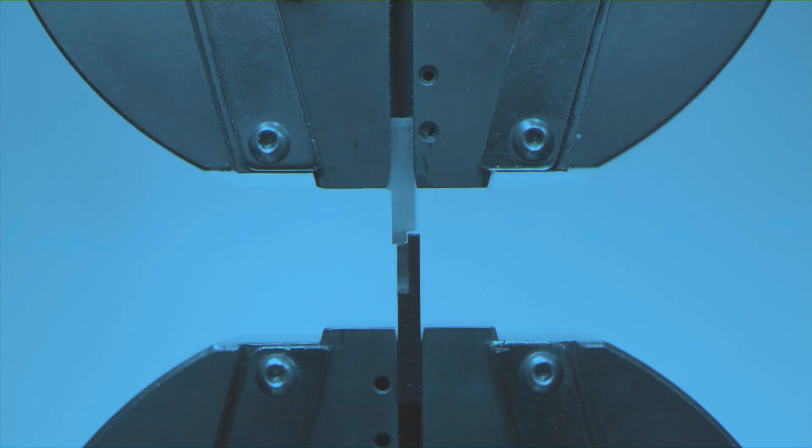Once we are done with the surface treatment, it's time to apply the adhesive. But which adhesives exist? That's what we will see in Module 4, Adhesive Families. We know now which surface treatments we should apply. It's time to look at the adhesive now and which adhesives we have at hand, especially for aeronautical applications.

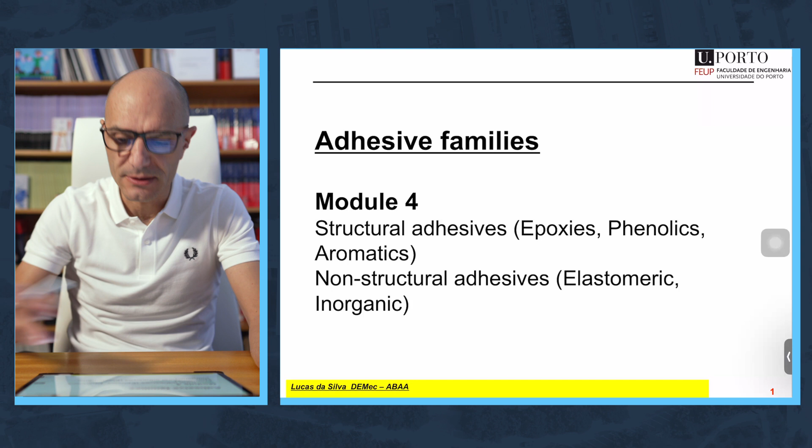I start with the most important one, the epoxy. It's, as I said, by far the most used. It's very strong, but also very brittle. This astronaut, I think, is very clear and illustrates well the key point associated to this adhesive, strong. It has low shrinkage, about 5% when it cures. This is very good because if you have adhesives that have a high shrinkage, then this will introduce residual stresses in the adhesive. Epoxies have a low, limited shrinkage, which is nice.

They can be supplied as one or two parts. When it's one part, the resin and the hardener are pre-mixed, but then they should be kept at very low temperature to avoid cure initiation. Two parts, the resin and the hardener are separated, and you just mix when you want to apply the adhesive. It has an exothermic cure, which is not very nice, because if you use too thick bond lines, the temperature will increase a lot during the cure and might even burn the adhesive.

The adhesive can be B-staged, that means it can be partially cured and supplied as a film, which is hard, but note that even a film adhesive that apparently is solid, when you apply it on a surface, it will melt because it needs to be heated, so it will go through the liquid phase that we know is indispensable to have a good wetting. That's the main adhesive family of the epoxy.

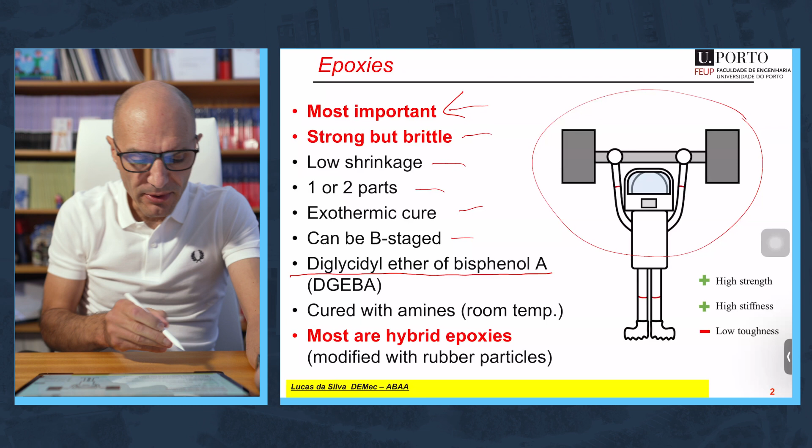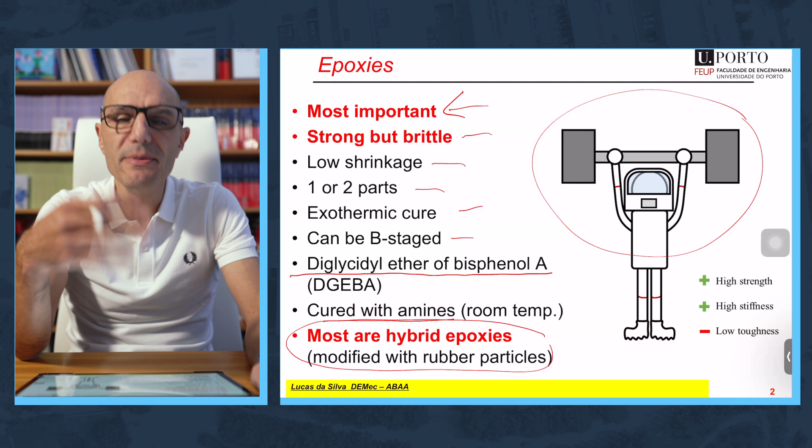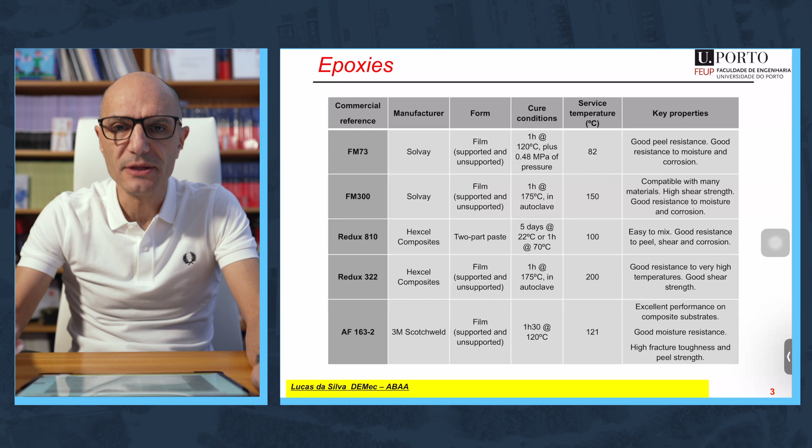Those that cure at room temperature, in general, use amines for the hardener. And in general, we are talking about hybrid epoxies. Pure epoxy is too brittle. So one typical way to improve the toughness of the adhesive is to mix it with rubber particles, and then we have toughened epoxies. You have in this table the most common film or epoxy adhesives used in the aeronautical industry. You see most of them are film adhesives. This one is a two-part paste, but most of them are film adhesives. In fact, most aeronautical adhesives are supplied as film adhesives. That's the most convenient way to bond big, smooth, plain areas.

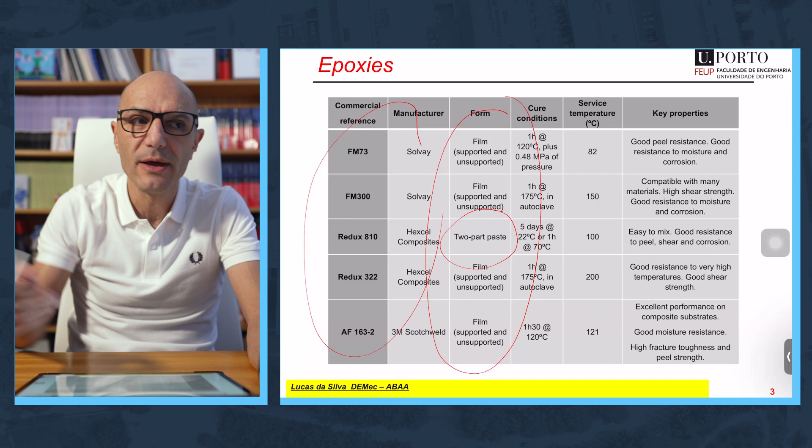And this is quite a conservative industry. It's very difficult to change the adhesive. These adhesives are very, very well characterized, and that's the adhesive they will use. Very difficult to change to another adhesive, because then they will need to run another set of tests, which is very time consuming, very expensive, and they don't really know how they will behave. They are fully confident in these adhesives.

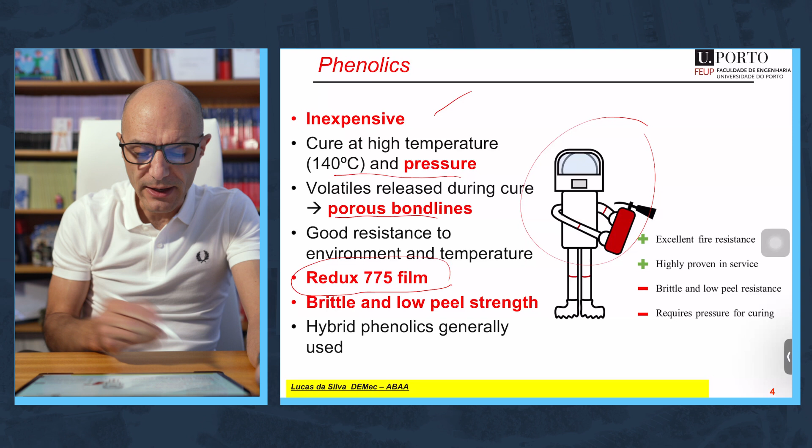Phenolics also, actually this is an historical adhesive. The first synthetic adhesive was a phenolic adhesive, a film. It's Redux 775, really historical in this industry. It's quite strong, and it's resistant to temperature, as the astronaut shows, and it's cheap. That's one of the most important things about this adhesive. But it needs a lot of pressure during manufacture. The phenolic needs a lot of pressure, otherwise you will have porous bond lines. And again, pure phenolic is too brittle. In general, they are modified with other adhesives.

But why are phenolics particularly sensitive to the pressure? That's because they cure by condensation. Some adhesives cure by addition, others cure by condensation. And those that cure by condensation, during the chemical reaction, there will be a release of water. And because the cure is at high temperature, we are talking about vapor, and this will expand. So to counteract this effect, you need to apply a high pressure to make sure you don't have porosity in the bond line. All right?

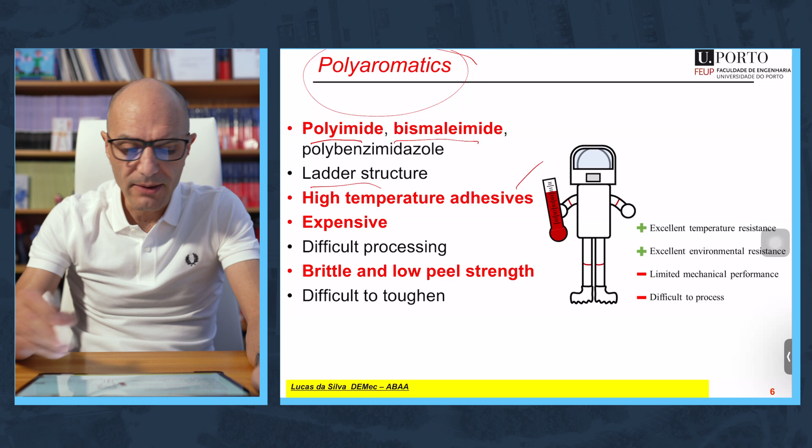Then you have the polyaromatics. These are extreme adhesives for very, very high temperature. We are talking about 300, 400 degrees C for these adhesives. Polyimide, bismaleimide are examples of these types of adhesives. They have a ladder structure that is very, very strong and withstands very high temperatures, but they are extremely difficult to process. The manufacture is a nightmare.

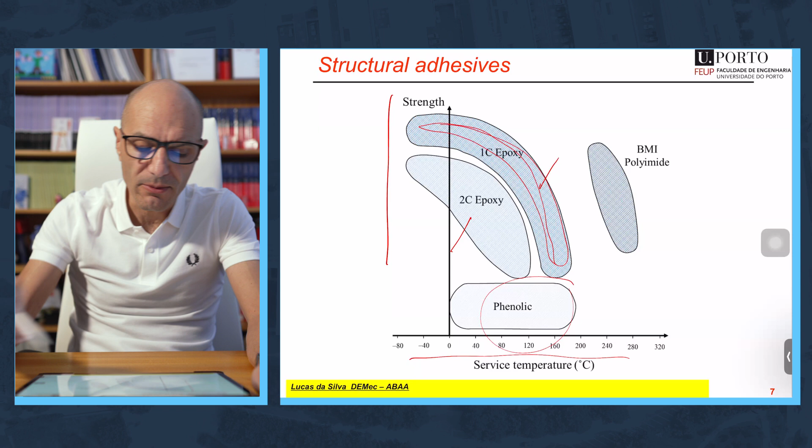You have here a graph that summarizes the most important structural adhesives. You have strength versus service temperature. So phenolic, nice in terms of service temperature, better than the two-component, as good as the one-component epoxy, but it depends, it varies. The thing about the phenolic is that it's very cheap. And then you have here, apparently the best ones, the aromatics, but I remind you that they are very, very expensive and very difficult to process.

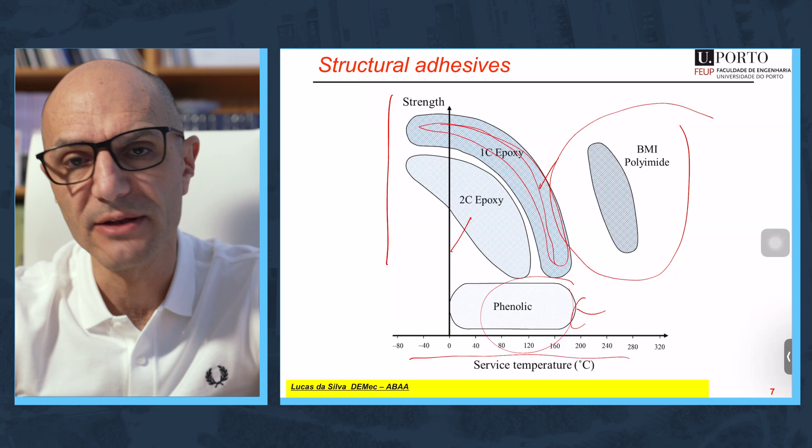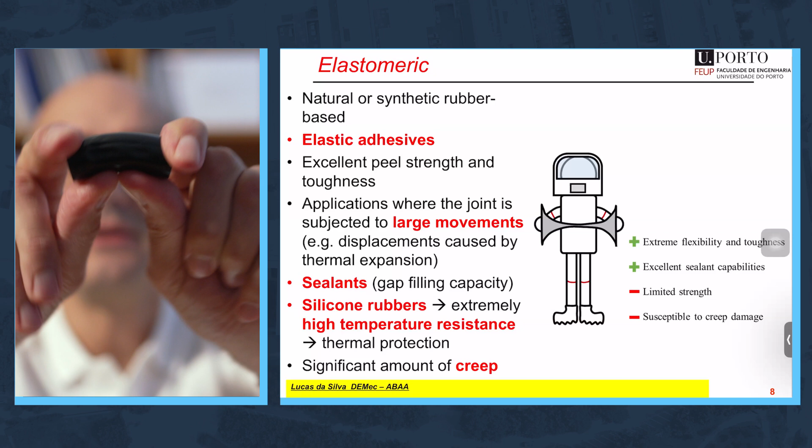A word about non-structural adhesives. They are also important in aerospace applications, especially when you need high capacity of displacement, like silicone adhesives. So let me show you what I'm talking about. This is an epoxy adhesive, so very, very strong, like rock. And here you have a very flexible adhesive. In this case it is a polyurethane, but the silicone is something similar. Okay, you can feel it.

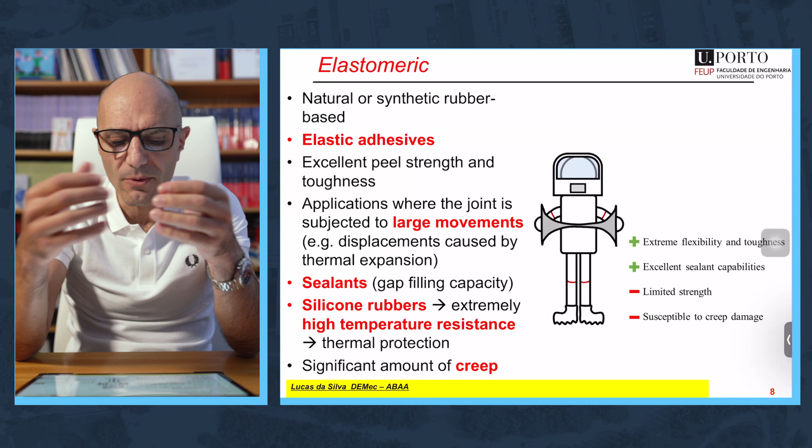And for some applications, you need this type of adhesive because it can compensate differences in coefficient of thermal expansion. So when you have big movements involved, you use this type of adhesive. For example, they are also used to bond the ceramic tiles in aerospace vehicles or the cork tiles that I showed you in the introduction module. But because in general we are talking about very high temperature, we should be careful with creep issues.

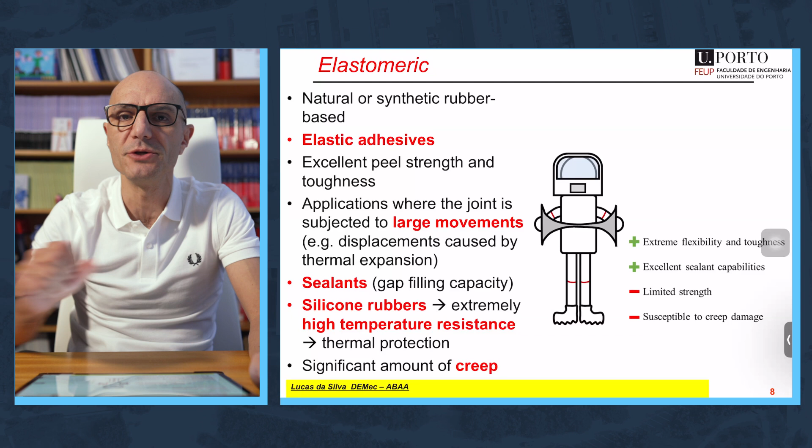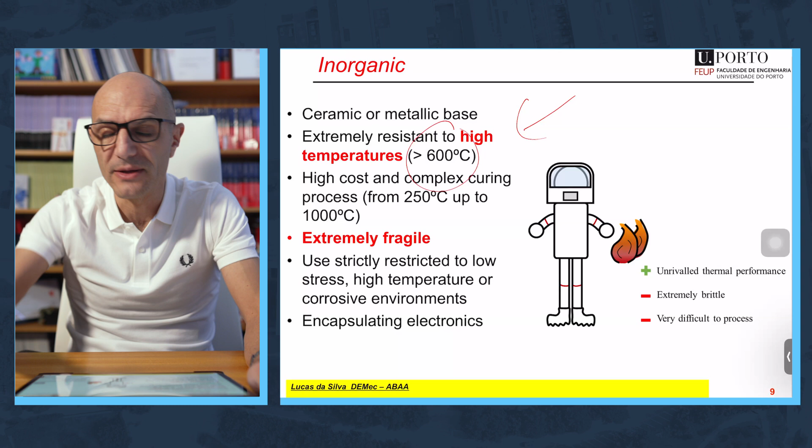Then you have a very, very special adhesive, this one. This is a ceramic adhesive. I told you in the introduction module that adhesives are polymers. This is the only one that is not a polymer actually. It's a ceramic. And it can withstand temperatures compatible with the ceramic, more than 600. But this is for very particular applications like encapsulating electronics, and it is extremely, extremely brittle, all right?

So that's it for the adhesives. You have the most important ones, the structural ones. That's the most interesting one. And don't forget, the king of adhesives is the epoxy. And in the aeronautical industry, in general, we prefer film adhesives.